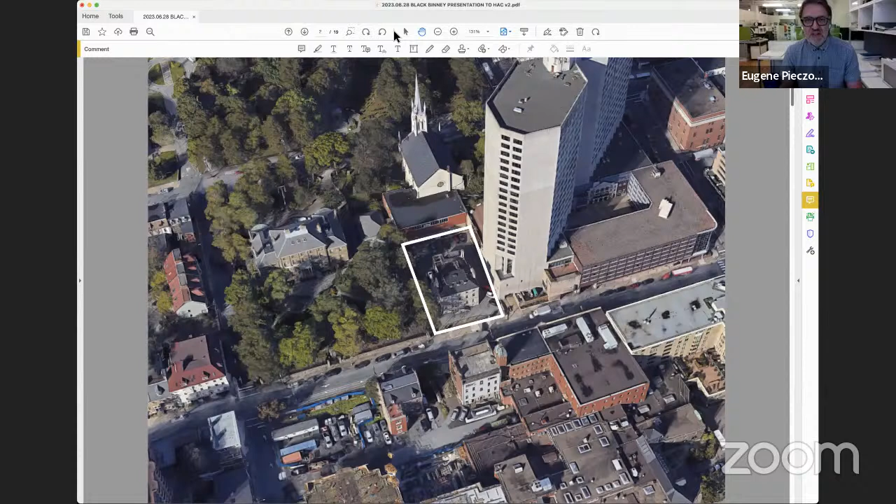As I'm sure you're all aware, it's neatly tucked into its site and bounded by the Bell Aliant Tower, St. Matthew's Church, and the rear gardens of the Lieutenant Governor's residence. It's also worth noting that the Black Binney, represented at the top of this plan, is not within a view plane as one might expect, because it's within the shadow of the Bell Aliant Tower.

So why are we here today in front of the committee? We're hoping that we can receive some special consideration for the Black Binney site to take into account some of its unique characteristics that we believe truly make it distinguishable from the rest of the properties within the Heritage District, and I'd like to take you through that.

So if we look at the site here, which is highlighted in white, you can see the Bell Aliant Tower to the right, St. Matthew's Church at the top, and the Lieutenant Governor's residence to the left. We have a site of approximately 15,500 square feet, so it's a modest property. It's 150 feet deep, 105 feet wide.

Once we take into account that the intention is to preserve the entirety of the Black Binney residence and its forecourt, that 150-foot depth gets reduced to 80 feet in terms of what area of the property remains to build on. Further to that, if we incorporate 10-foot setbacks around all four sides of an addition to allow for roof transitions, and setbacks against adjoining properties to accommodate windows and balconies, as well as construction logistics, that 15,500 square feet is reduced to about 5,500 square feet for actual additions.

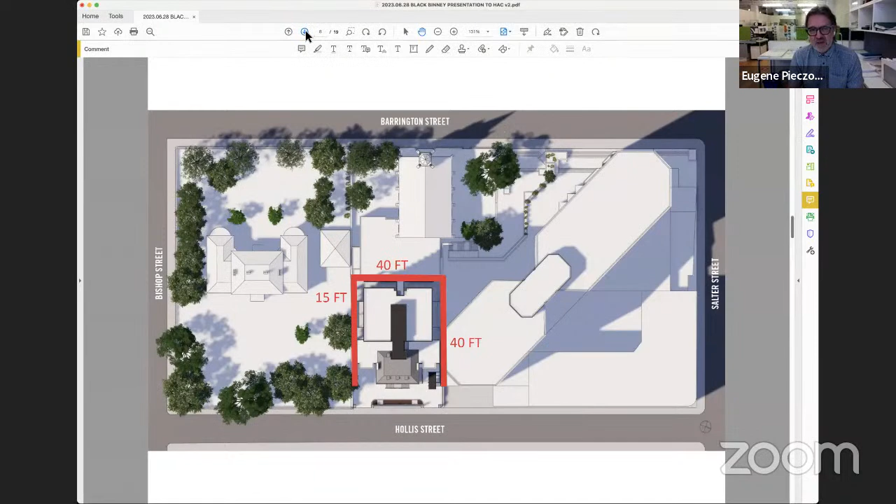And then there's a lovely stone retaining wall separating the rear gardens of the Lieutenant Governor's house. So we have this sort of 4-story hole that we have to build our way out of before we can have any floors with access to windows and actual occupancy. It's really only at the 5th story that we will have any usable floors.

So when we think about this from a massing point of view, please note that this concept design was done 5 years ago and is really mostly intended as a test fit on the site, to see how a building might be accommodated. But what it represents from a massing point of view is how much the building actually occupies on the property, and its context again is very unique within the district.

We are at the heel of the Bell Aliant Tower, and again generously set back from the other heritage buildings.

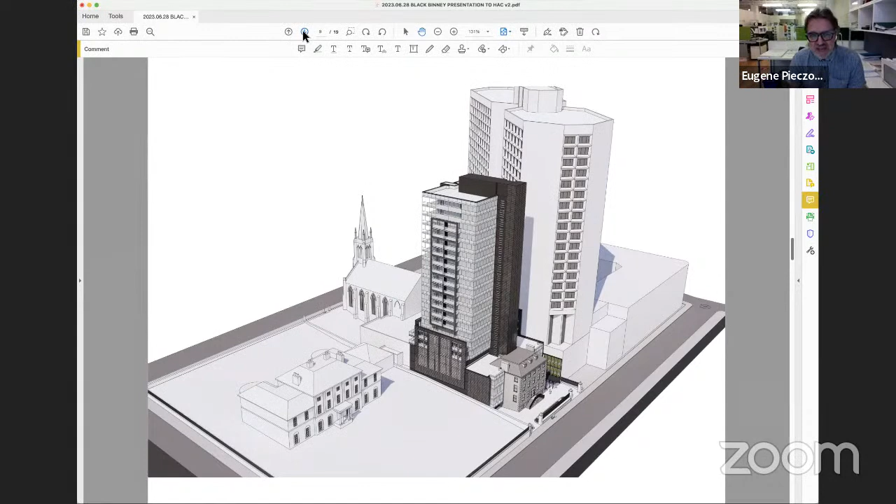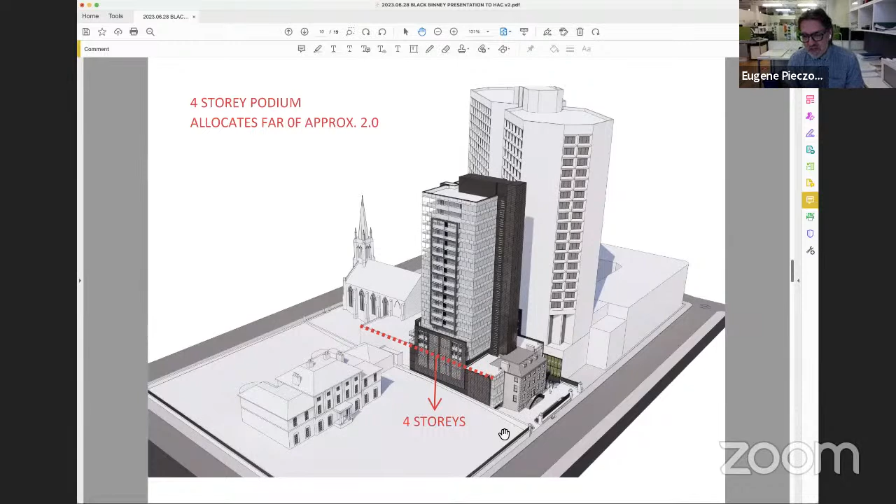Coming back to that kind of 4-story hole that we're in, which really aligns with almost the top of the Black Binney residence itself -- those first 4 stories, if we're limited to an FAR of 4, is going to use up half of our allowable FAR. So really, those first 4 stories, which can only be used primarily for things like parking garages and building services, are using up half of our FAR.

So that remaining FAR of 2 only represents about 31,000 square feet of building, which on a site with only about 5,500 square feet of floor area per floor might give us another 5 stories above that 4-story limit. With only probably 4 units per floor, because they're small floors, that only amounts to about 20 residential units. So very quickly, the site becomes economically unviable.

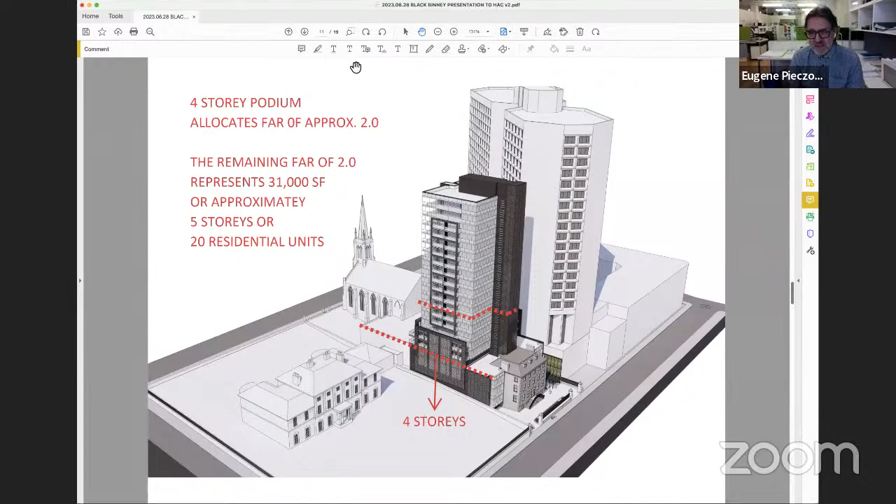This would never proceed in any way, shape, or form, while also factoring in the premium for construction costs because of the constraints of the site and the complications that arise from building on a site like this. So this is why we're representing a taller building at approximately 22 stories, because in order to make it viable, we need more height, which ultimately requires more FAR.

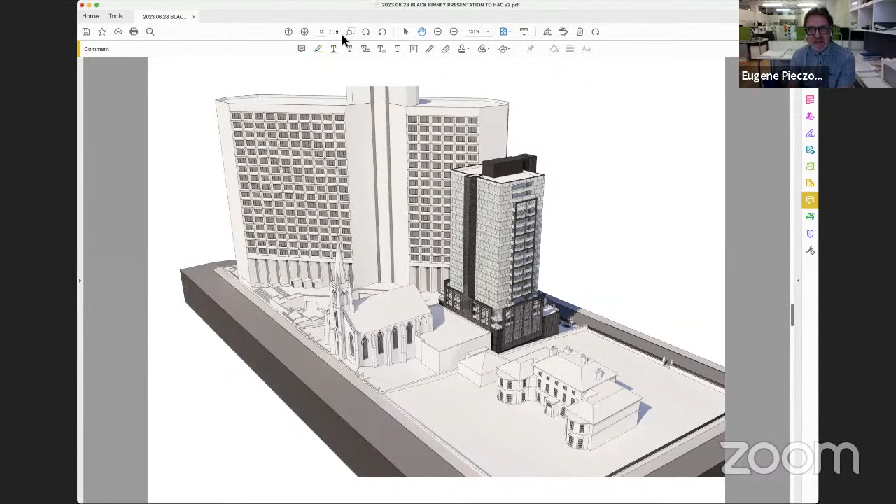So when we look at this quickly in 3 dimensions from other views, you can kind of see how we're modestly within the shadow of the Bell Aliant building, but you can also see how we're quite generously set back from the rear of the church and the side of the Lieutenant Governor's residence. Contextually speaking, we feel that this is actually a very modest proposal. And again, you can see how we almost end up as a bit of a transition between the Bell Aliant building and the remainder of the district.

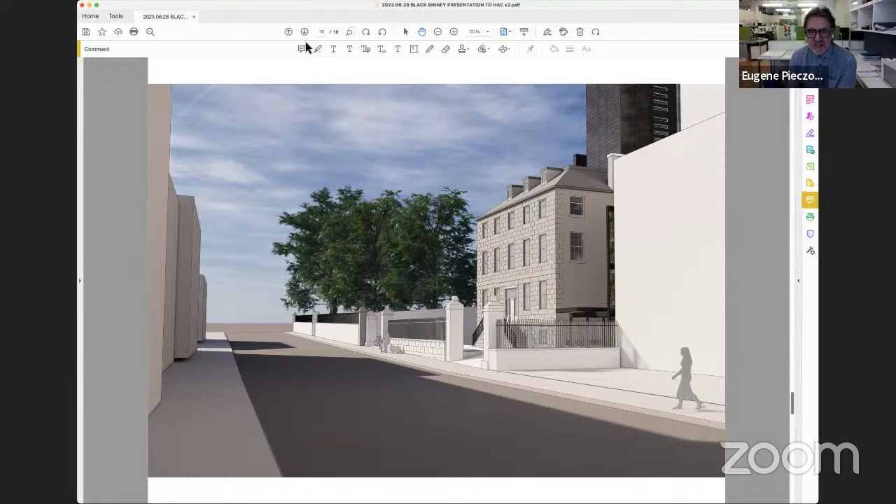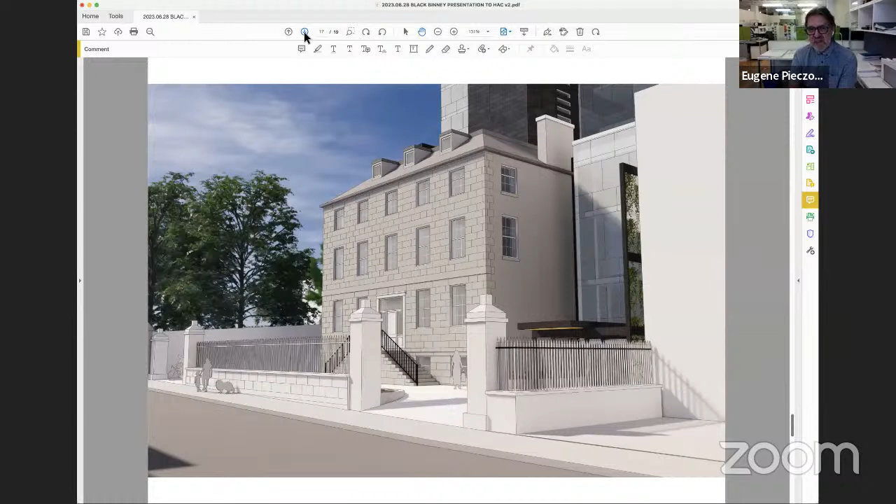And then finally, thinking about the pedestrian view, what we hear from heritage experts is that it's really that first 4 stories that represent the pedestrian experience. And because we very much want to preserve the 3-dimensional presence of the Black Binney residence, and because we're entirely set back behind the full depth of the house, the tower behind it really doesn't become part of the pedestrian experience. It really becomes unnoticeable in a way.

What these heritage experts tell us is that, regardless of whether what's behind it is 8 stories, 9 stories, 11 stories, or 22 stories, it really becomes an imperceptible experience for the average pedestrian. And that affords us the opportunity to invest in the preservation and restoration of the house and its forecourt, and do some meaningful new additions that are of equal quality, but in a more modern way, interpreting some of the characteristics of the Black Binney house.

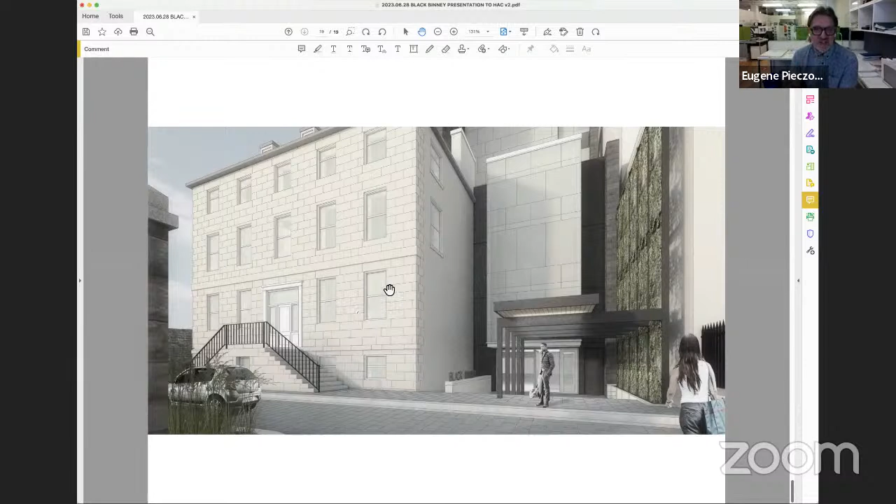Hello, am I on? Yes, you are. Oh, okay, yeah, thank you.

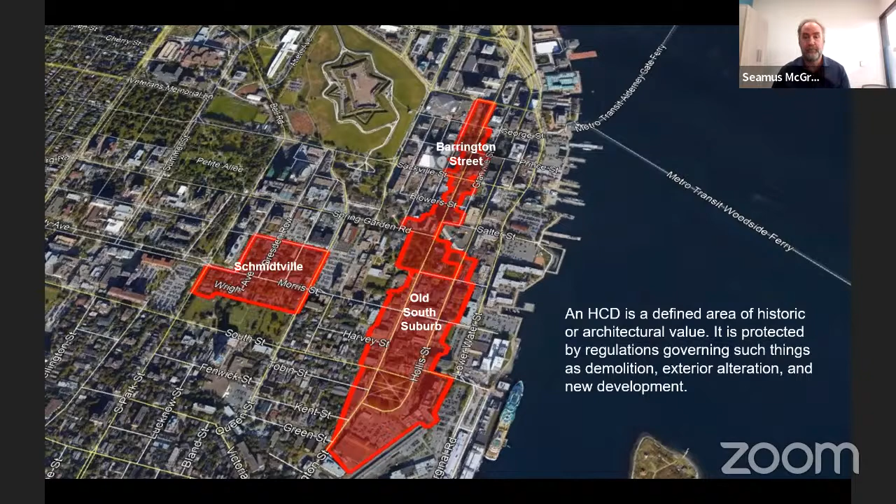What we're also seeking to do is combine the existing Barrington Street Heritage Conservation District and the existing Old South Suburb Heritage Conservation District into one new plan, to be called the Downtown Halifax Heritage Conservation District. There will be a consolidation of planning measures and heritage measures to establish consistency in administration. We'll also be repealing the existing Barrington Street HCD and the existing Old South Suburb HCD to reduce the number of bylaws that the municipality has to administer. It's a bit of cutting red tape by consolidating these documents and creating one new framework for the entirety of downtown Halifax, rolling these 3 separate areas into one new plan.

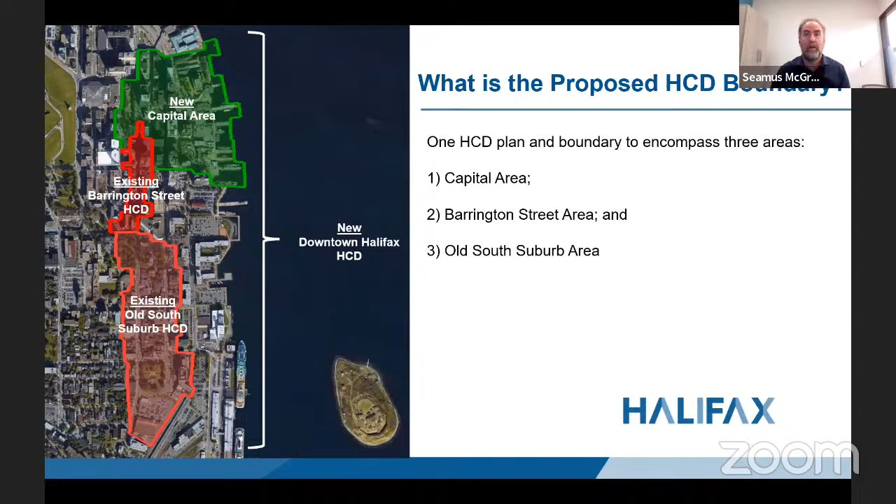There's a great deal of development pressure in downtown Halifax. Downtown Halifax is experiencing some of the fastest growth in the country. The real estate is some of the most valuable in Nova Scotia. This is propelled by the Cogswell redevelopment project currently happening. There's a lot of development proposed for the Cogswell site once it's ready, and this will spur development in downtown Halifax, so we have to prepare ourselves for that kind of change.

There's also been, since 2009, a loss of many heritage buildings. A benchmark study done in 2009 identified about 100 future heritage buildings that could be registered as heritage. Since 2009, over half of these buildings, about 50, have been lost to demolition. So it's an important time now to protect the remaining unregistered heritage properties in downtown Halifax through the designation of a heritage conservation district.

Looking at the proposed boundaries of the Heritage Conservation District, you see them here: 3 distinct areas - the Capital area, Barrington Street area, and Old South Suburb area. The boundaries will encompass these three areas.

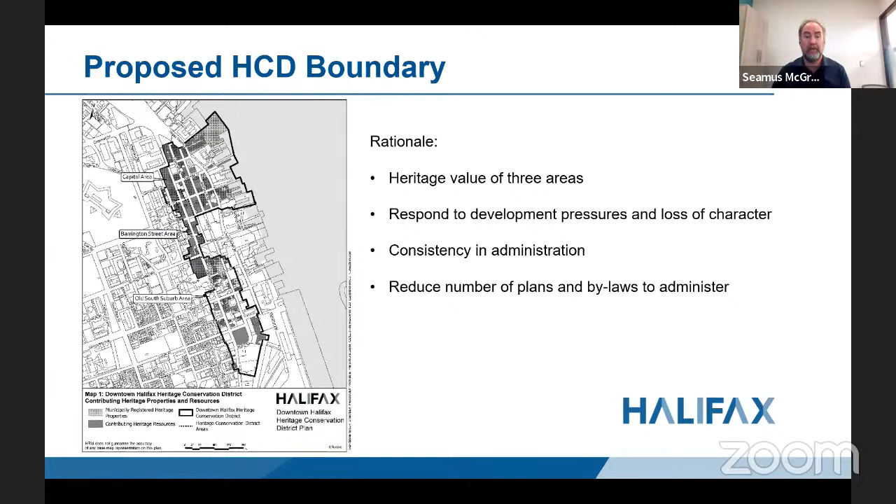Just talking briefly about the heritage value of these 3 separate areas. The Capital area is the original town of Halifax. It became the seat of provincial and municipal governments and an important center of commerce and waterfront industry. This is arguably the oldest colonial settlement in the Halifax regional municipality. It's the original town established between the harbor and Citadel Hill, and a very, very significant area.

The Barrington Street area is the principal arterial street, which became the main commercial street in the late 19th century. And the Old South Suburb was the first suburb of Halifax, and is recognized for its important Georgian and Victorian residential architecture.

In terms of the process, as mentioned, the process was initiated with the adoption of a background study. This is a legal document that council approved. It was also reviewed by the minister and approved by the minister on May 4th, 2021, which initiated the process to establish this heritage district.

The planning and community engagement phase included 2 public meetings in 2021 and in 2022, and many workshops and meetings with stakeholders, including the development community, businesses, and concerned citizens. The completion of that phase of the project is June of this year.

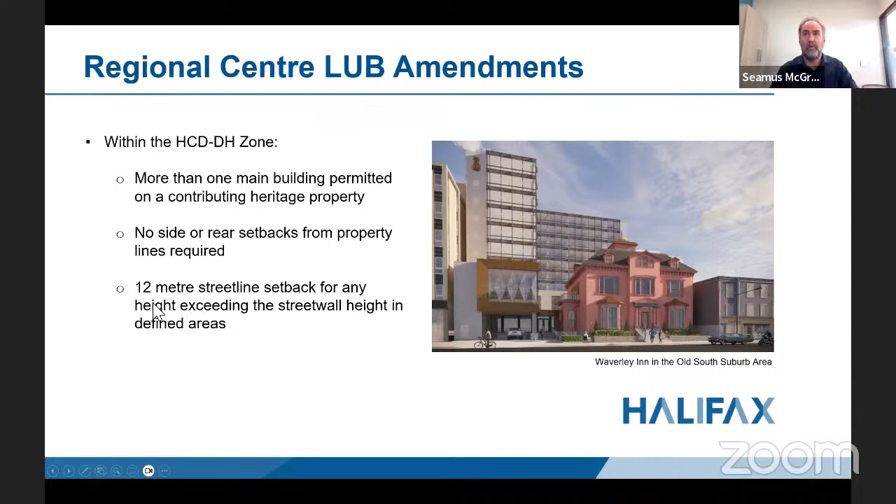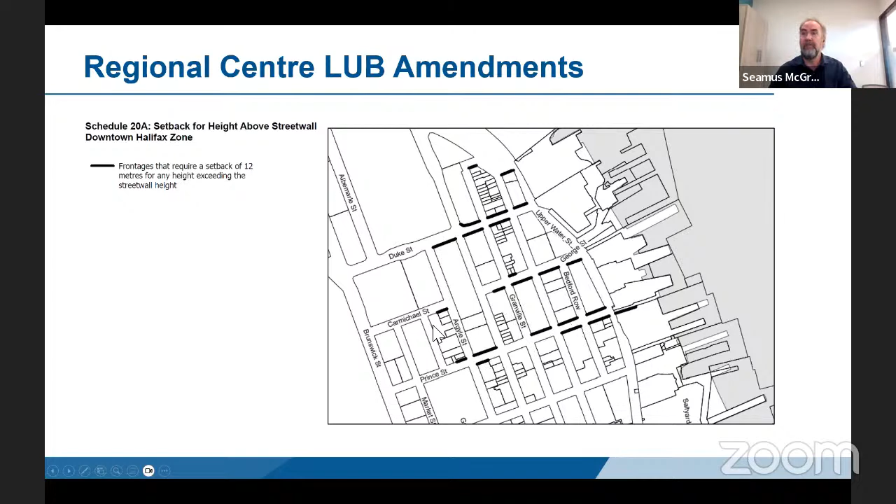There will be a 12-meter street line setback for any height exceeding the street wall height in defined areas. This provision already applies within the Old South Suburb area, and we're proposing to introduce it within the view corridors of the capital area. These are shown on Schedule 20A in the package. The black lines represent where the 12-meter setback above the historic street wall applies, on street frontages with registered heritage properties. I'll go to the next slide to explain what that means.

Any development must be set back 12 meters before it can rise to its allotted height. In the case of this historic building, this essentially preserves the heritage building, because you can't build on top of it - it has to be set back from the street wall by 12 meters. This preserves the prominent east-west view corridors from the harbor to Citadel Hill that are so important to the character of this area, and it also maintains the building heights along these view corridors.

These are examples of approved site plan approvals on the Waverley and Elmwood sites in the Old South Suburb, where this 12-meter setback has been applied successfully. As you can see, any development behind the Elmwood is set back into the rear, and the same case with the Waverley Inn - these are 9 to 10-story structures set back 12 meters in the rear of the heritage properties. This is the type of development we're proposing along the view corridors in the new capital area.

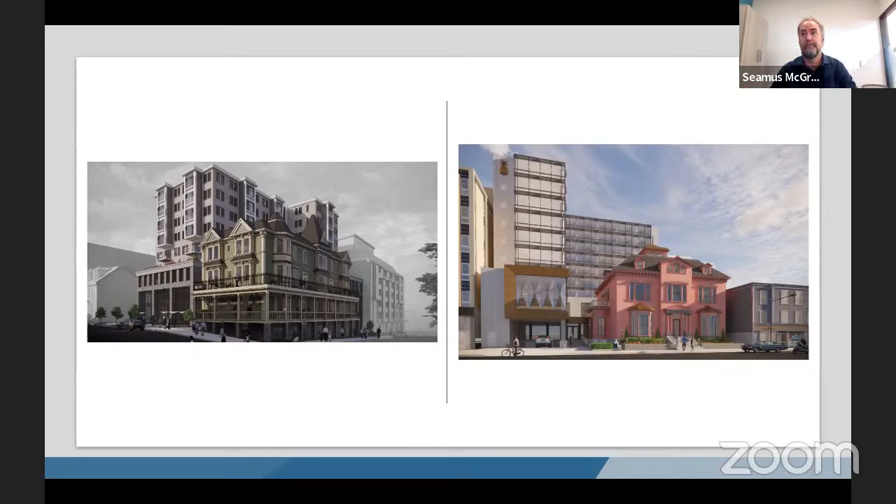In terms of changes to heights, we're only proposing changes to heights within the capital area. We're reducing heights on Province House Square from 22 meters to 11 meters for obvious reasons. We don't want to see tall buildings built on top of the Legislative Assembly building. It's just common sense.

Elsewhere, where there are existing open spaces, we're reducing height to 4 meters so that large buildings are not constructed on important open spaces, such as the Cheapside property in between the Nova Scotia Art Galleries location.

We're also proposing to increase heights strategically. Where heights can be increased, such as on these sites here, we recognize there will be a decrease in development potential where we introduce that 12-meter setback. So we are trying to find other places where height can be added so there's no net loss in total developable area. We actually designed this plan to ensure there was a net increase in development potential by ensuring height can happen where it's not within significant heritage resources.

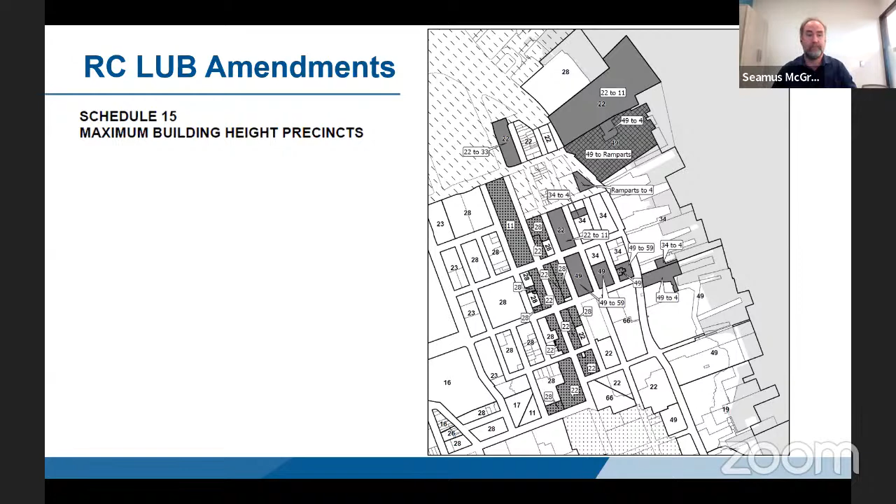So in terms of the process, we're finishing up the drafting of the Heritage Conservation District Plan, looking to begin the review and adoption process by presentation to Heritage Advisory Committee today. Once Heritage Advisory Committee provides a recommendation to Regional Council today, it would proceed to Regional Council and notice will be given of a public hearing.

A public hearing will be held. All households, including apartments, all units within the proposed downtown Halifax Heritage Conservation District will receive notice in the mail. A newspaper ad will be published of the public hearing. Regional Council will hold the public hearing and make a decision at second reading.

It's important to note that once Regional Council does make a decision, the documents are submitted for approval to both the Minister of Communities, Culture and Heritage and the Minister of Municipal Affairs. Once the Minister decides to approve these documents, then they become in effect. They come into effect only after ministerial approval.

So in conclusion, the capital area will be the new part of the Heritage Conservation District. It's one of the most significant areas in HRM. There's no question of the heritage value of downtown Halifax, associated with the economic, social, political evolution of Halifax, the province, and even the country, which continues to the present. The downtown Halifax secondary municipal planning strategy has long envisioned a renewed community focus for this part of the downtown, and the HCD plan and bylaw will protect the many significant registered and non-registered heritage buildings in this area.